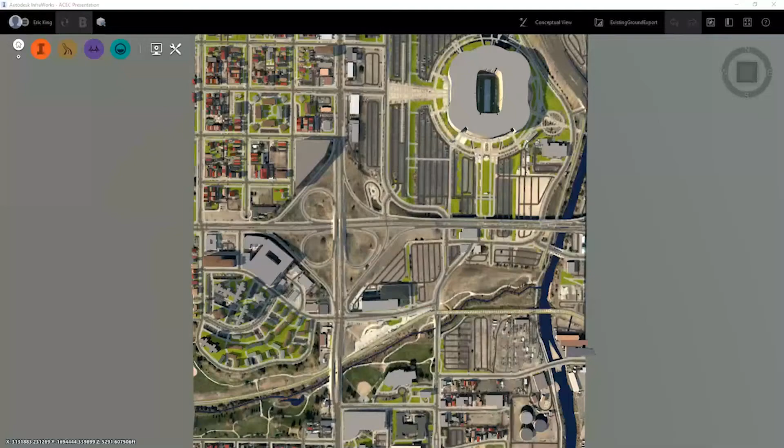One of the things I find with InfraWorks and Concept Station is you create this great big model. Yeah, it looks cool, but then what do you do with it? A lot of the time what you're actually trying to produce is something in plans, something that you can print.

For any of you that have ever used InfraWorks or Concept Station, you know that there really isn't much presentation that you can do with these types of programs. You can take screenshots, export images, do videos, but if your end goal is to actually create a plan set, it doesn't really help you out all that much to use something like InfraWorks.

There's a lot of data out there. You can get GIS information, GIS shape files, but you need to make sure you understand what you're looking for as far as coordinate systems. You can end up in any part of the world or any part of the country. A lot of people, that's the hindering factor for them. They don't truly understand what coordinate system they're working on, and sometimes they get data from different sections, and things just aren't lining up correctly.

So, to create a base file using InfraWorks, you have to create an area that you're going to be doing your study or proposal using InfraWorks. In this case, I live in Denver, or Lakewood, a suburb of Denver, so I'll show you an area around my neck of the woods. If we go to InfraWorks and open up the model builder, we can search for Denver, Colorado, United States, zoom in and look at the area we want to do our project.

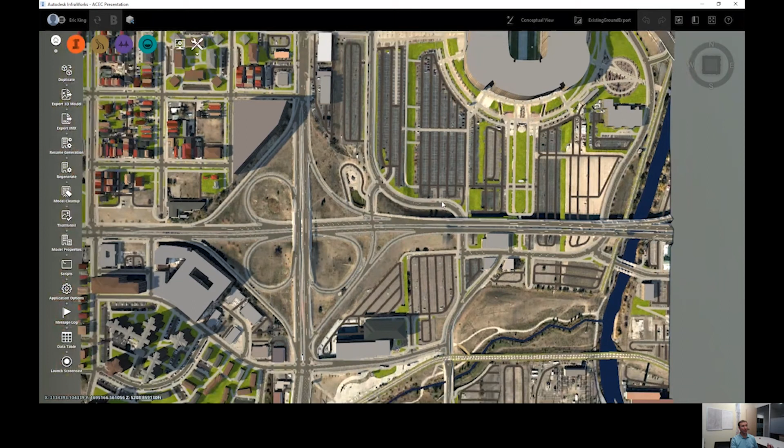All you have to do is go up to your settings and say export to IMX. IMX is the type of file you can create using InfraWorks to get into AutoCAD. When you first create your model, it automatically brings in all the different layers I mentioned before. You can see all the different types of data by opening up your data sources catalog - as you can see, there's a lot of stuff in here.

When you export your InfraWorks model to an IMX and bring it into CAD, this is a lot of stuff - things that could potentially make your computer crash, and honestly, a lot of things you're just not going to end up needing when you create the Civil 3D model.

So one of the things you can do, if you're going to be coming back to this, it's always nice to save a copy of this model space that has all your data. You can go in and make different copies so you can always come back. I'll make another copy and just call it existing ground export.

While that's loading, or after it's loaded, you can go in and delete all the things you probably don't think you're going to need. I don't need waterways, I don't need other roads, I don't need the ground, I don't need these coverage areas or buildings - you can delete all that info from your model. You probably don't need railways either.

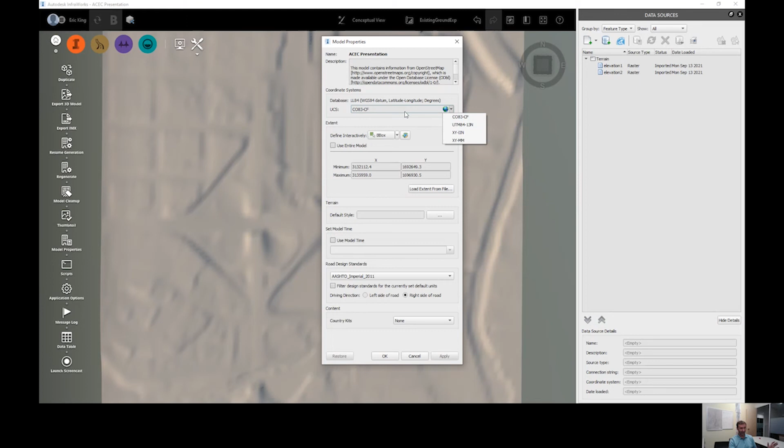In this case, I was on the UTM 84 13N coordinate system. A lot of the available information in the Denver area is actually this Colorado 83 central system, so I went ahead and changed that, and changed my roadway design standards to be in imperial instead of metric.

When you make those changes, it doesn't actually take effect in your model until you save and close out, so make sure you save and close out before you start exporting your model. Once we've got our model set up to having just the existing ground terrain, this is what we want to bring into our AutoCAD file.

Like I mentioned before, you can go up to the settings and just say export to IMX. Go ahead and make sure that your target coordinate system is the same as the one you're working in, and then go ahead and pick a location where you want to save your file. I'm just going to call it existing ground.

If you wanted to pick a specific area that you wanted to export, you could draw in a polygon or a box or a shape for that specific area. In this case, I want to export the entire model to bring into AutoCAD. Then all you have to do is click export.

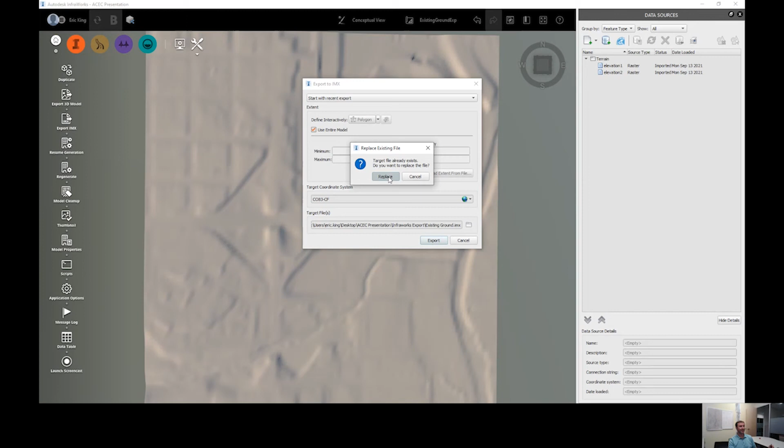As you can see, I've done this once before, trying to get all my files set up, so in this case I'm going to replace it. And boom, because it's not a very big file, there's not a whole lot of other information like the existing roads, it's a pretty quick export. So now that I'm done with that, I can go into AutoCAD.

One of the first things that you want to do in AutoCAD is to set your AutoCAD file in the same coordinate system that you're using in InfraWorks. Not a whole lot of people mess around with the coordinate systems in AutoCAD. They typically just leave it as unspecified in your tool space. Most of the time that's okay since you're not bringing in a whole lot of different information, so it typically doesn't matter. But you can set that coordinate system by going into the settings tab of your tool space.

Go into the right-clicking on the drawing settings for the file, and it's popping up on my other screen. Again, when you first open up this file, it probably says no projection, no datum. I've gone ahead and clicked on USA, Colorado, which is where I'm at, and then selected that same 83 Colorado State Plane Central Zone and US foot, CO83CF, which is the same one that I selected in my InfraWorks model. So once you select that, you can click OK.

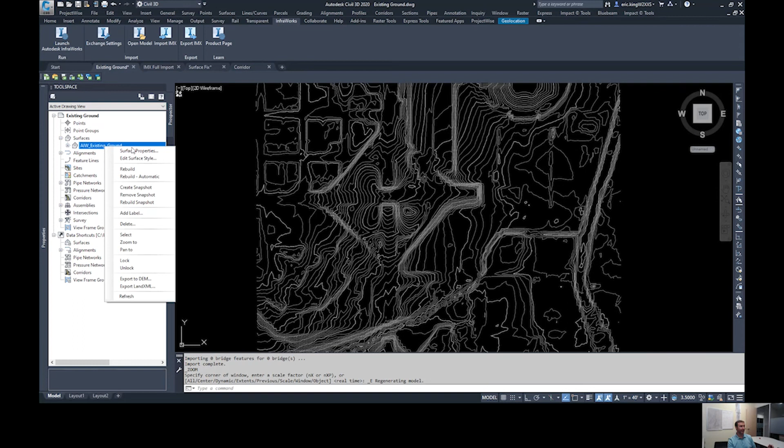If you have a seed file with all of the layers and configurations that you like to use for whatever workspace that your client's working in, you can start out with that as your seed file. So when you bring it in, you can go ahead and set all of your surface properties with all the styles and layers that you like to use.

Again, this is just an out-of-the-box file that I'm using for this demonstration. Let's see, you can go ahead and change your contours to display any way you like.

Then one of the other great things about working in a file with a coordinate system is you can see that my geolocation tab is actually highlighted. If you are working in a file that does have a coordinate system and you are actually logged in with your Autodesk account, this is one thing that a lot of people don't actually do when they start working in AutoCAD.

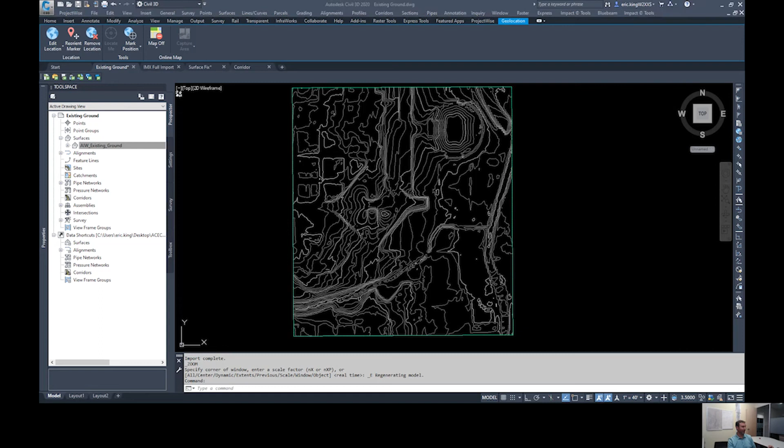If you're using the cloud licenses, or if you use any of the automated features for updating your software, in the lower right-hand corner of your toolbar on your desktop, you can load the Autodesk little app here that shows you all the programs that you have and everything that you can update. If you are logged into this, then one of the great things that you can do is you can actually turn aerial on and off to be able to have an aerial background as well in your file.

So without having to go in and download aerial tiles or anything like that, you can just load this to use as your backdrop for your files. So now I've got contours and I've got aerial. I'm already halfway there to being able to start laying out my design. One of the good things about this aerial is that it's very quick and easy to access. One of the bad things is it's not as customizable. It auto-populates, I believe it's a Microsoft Bing aerial map. It's pretty up to date as well.

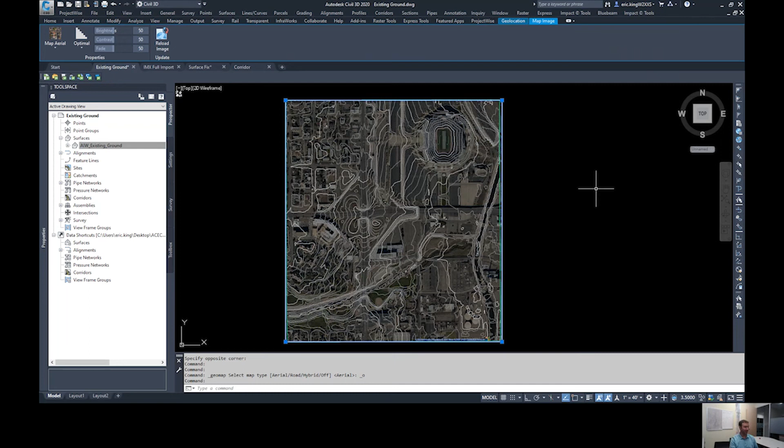One of the things that you can do is if you wanted to create a snapshot of the aerial so that you can manipulate the transparency or anything like that, you can do a clip of that, click the area that you want, and then turn the map off. And now you've got a snapshot of just that aerial. Now you can go in and start adjusting the transparency if you don't want it to shine up as bright, or the brightness or the contrast, all things that you can do to make that aerial look nicer or to look the way you want it.

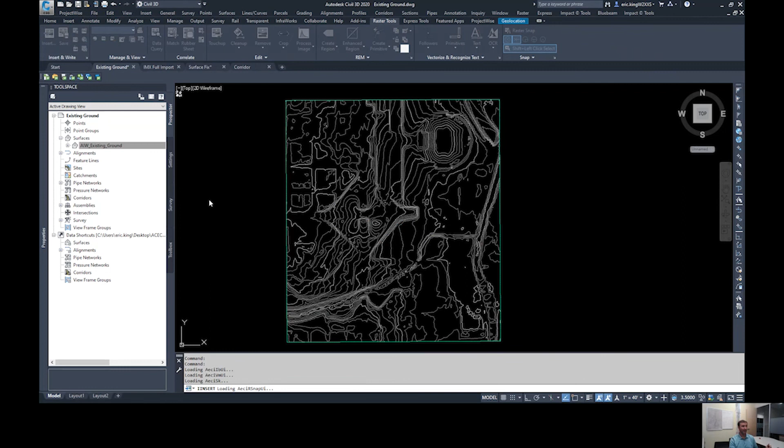In my case, I typically like to go in and find aerial from other sources, something to bring in that's a little bit more high resolution. I use Nearmap for a lot of the aerials that I bring in. You can either use the aerial that I just showed you, or you can bring in aerial from Nearmap, for example. A lot of people, if they have an aerial image, bring it in through the XREFs, where they can just attach an image. One of the bad things about this is bringing it in like this doesn't recognize the coordinate system.

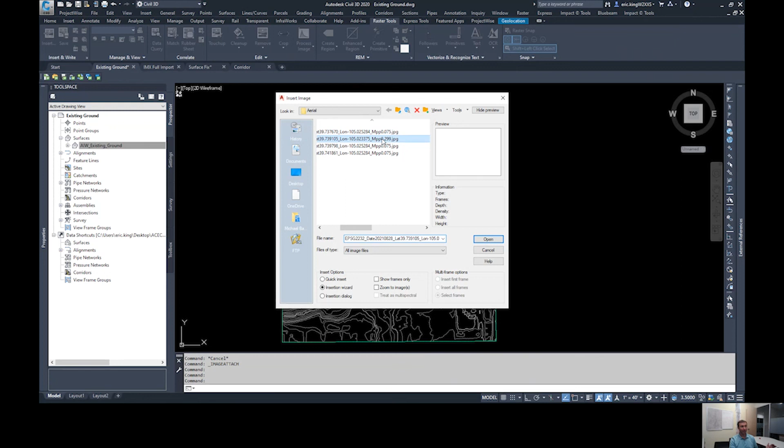If you go up to raster tools and insert, you can actually grab a georeferenced aerial image versus just a TIFF or a JPEG that's not georeferenced, that you'd have to set where that location is. Georeference, again, automatically brings something in where you want it. And again, I downloaded these aerials in that same Colorado Central State Plane coordinate system.

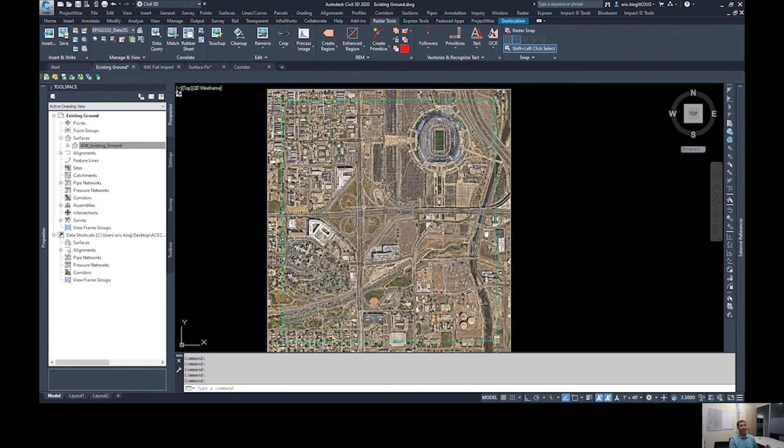So as you can see now, I have an even higher resolution aerial that, again, I can click on and manipulate any way that I want and create an aerial XREF base file to save and to reference into my sheets. For this drawing, I'll just go ahead and detach it. But yeah, just a couple different options of bringing aerial into your files. Once you bring that in, then you can save this. You can start creating your data shortcuts the same way that you would set up the design in any of your other sheets.

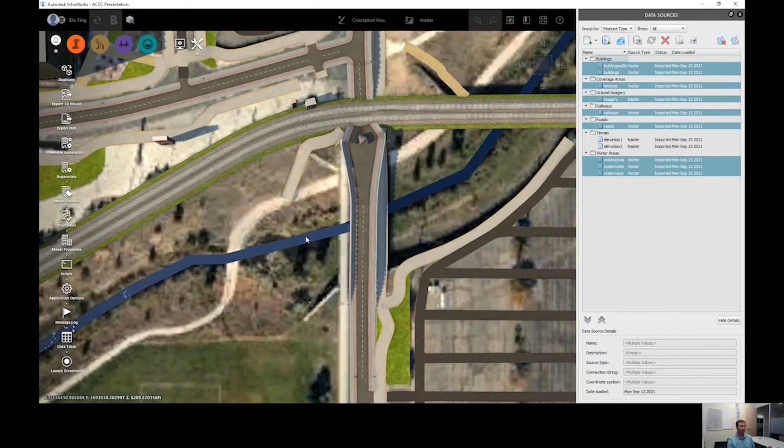Okay, now let's see. One of the other things that I use this for, if you do a lot of work in InfraWorks, such as proposals or graphics for public meetings, one of the things that I find never ends up looking quite the way that I want it is an existing ground near a bridge. If I go back to my master file here, as just an example, you can see that InfraWorks brought in a small bridge over a canal that has a drainage ditch going through it. That is definitely not what I wanted the existing ground to look like in this area.

And if this is an area that I was proposing a new bridge or creating a graphic for, I wouldn't want to show an existing ground that looks like this. So if you're setting up AutoCAD files to actually produce a plan set off of, that's one thing. Or if you want to just manipulate data to then bring back into InfraWorks, that's another great tool to use, Civil 3D, to manipulate that surface.

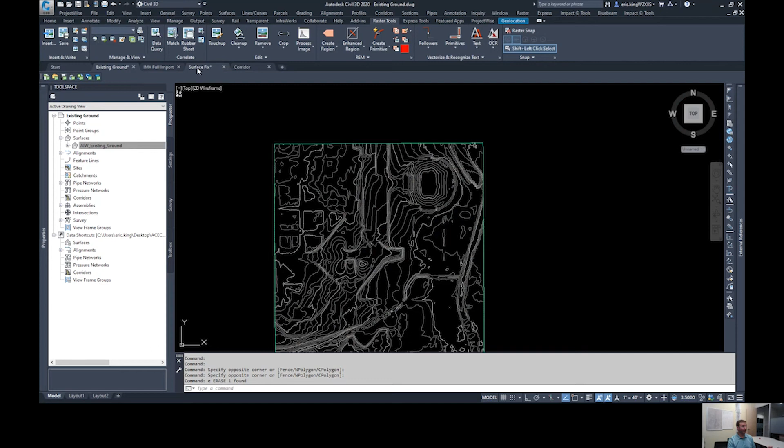I won't go through the entire exercise of how you would want to do that, but if you bring in your existing ground surface, in this case, this is that area that had that small bridge and channel going through it. I do know that I want more of a defined channel in this area, so I drew in some break lines and added those to my surface to create more of an actual channel shape underneath that bridge.

All you have to do is make sure that your file is saved. And then you can go back to your InfraWorks tab, and then this time, instead of saying import IMX, you can say export IMX. It asks you where you want to save that file. It automatically saves it in the default location of where your file is located. It asks you what version. I typically do the version 2.1. And just like that, it exports your surface into an IMX that can then be imported into InfraWorks.

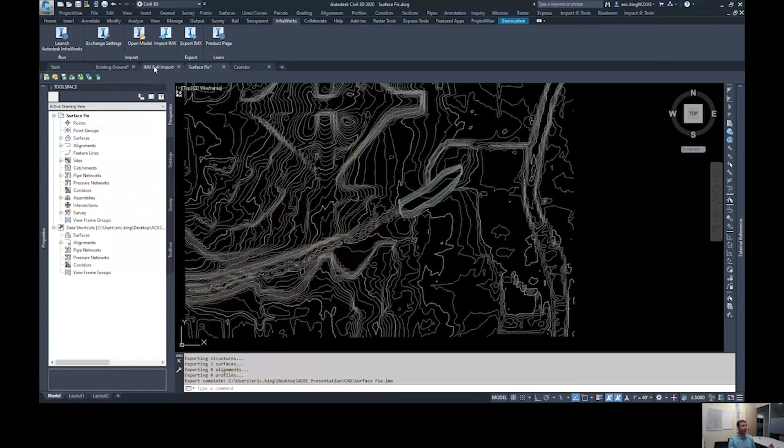One thing that I forgot to show you is back when we had our InfraWorks file that did have all of these items. If we were to export to an IMX with all of this data as shown right here, you'd end up with an AutoCAD file that looks like this. It tries to create an alignment for every single roadway that your InfraWorks model tried to create by default. So in this case, every single parking lane in a parking lot, every single side road, every single

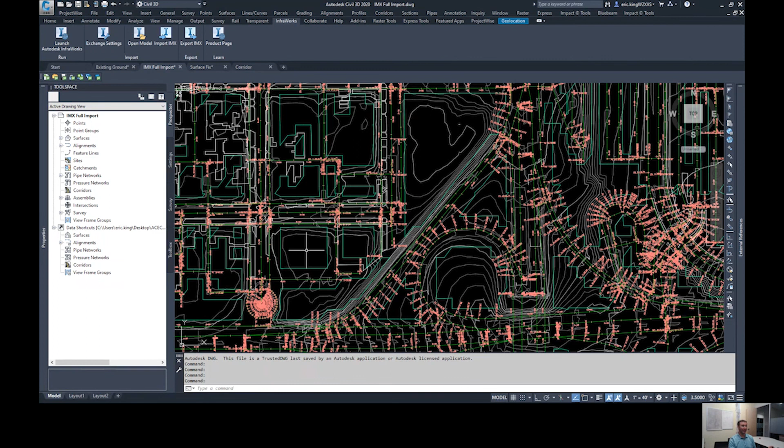alley. It tries to bring in the shapes of buildings, which you don't necessarily need. Sometimes it's kind of nice, but they're not always accurate and up to date. It created alignments for cul-de-sacs. So yeah, a lot of stuff that you'd end up having to delete out of your file. So it's nice to just delete it out of InfraWorks beforehand versus trying to delete it all out of Civil 3D after you bring it in.

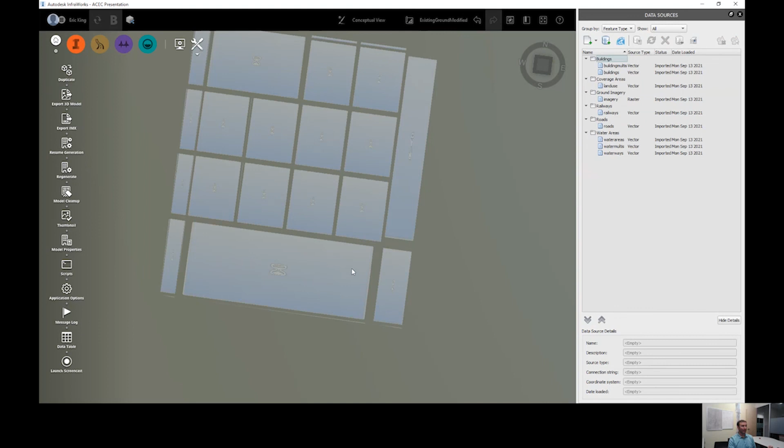Sorry about that. So yeah, back in InfraWorks, now that we have created our file from AutoCAD, again, we can go in and create another, actually I already created one here called Existing Ground Modified. This is just a copy of our master model. You can see that there is a terrain here. We want to go ahead and remove that terrain out of our file. What that does is it flattens all of the data that we have in.

These are all of our planning level roads and water surfaces. But again, you can see that the buildings are actually already snapped to the surface when they were imported. So we can bring in the IMX that we created from AutoCAD by just importing IMX in our Data Sources tab and browsing to our folder. Export, and I called this, oops, sorry. Oh, I saved it under Surface Fix.

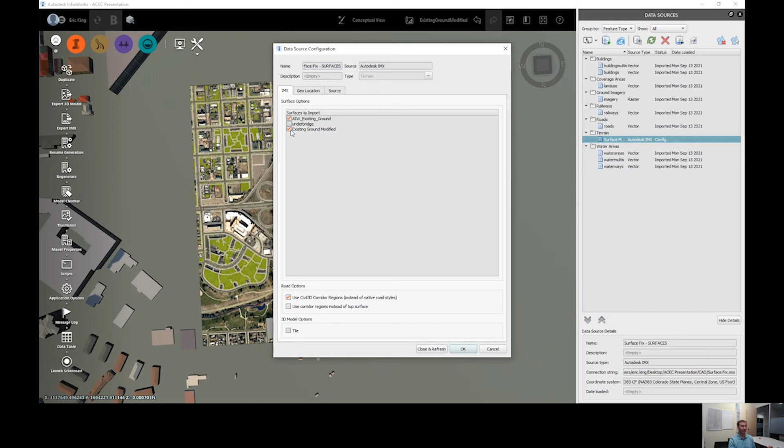And when you bring it in, a lot of the times it doesn't automatically configure, so you have to go in and configure the file. In this case, all I want to bring in is the existing ground modified surface that I created. So I want to make sure that's the only one checked. Hit close and refresh. And then if we zoom back to that location, you can see for that small area where I went in and adjusted the surface, now it looks more like you would expect, a nice well-defined channel.

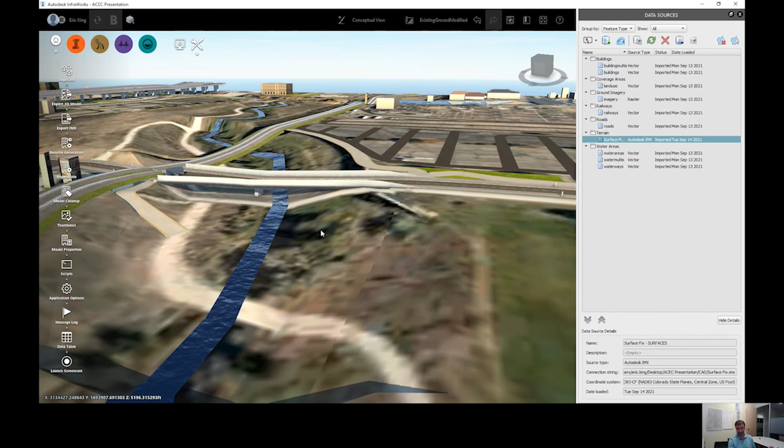Okay. So once you're working in AutoCAD, you've got your existing ground surface in there, and you can go in and start laying out your corridors, any of the design that you're looking to do. And if, say, you did want to create some graphics in InfraWorks from the work that you're doing in AutoCAD, you can also export items from AutoCAD back into InfraWorks.

It's not a straight update back and forth. If you make something in AutoCAD and bring it into InfraWorks, they don't necessarily read each other live. You do have to do an export from AutoCAD back into InfraWorks whenever you want that new change to be updated. Again, here we just have a corridor. Whenever you export to an IMX, you have to make sure and hit save first. And again, we'll do the same thing here. Export to IMX. Where do you want to save this? It's going to save it in that same folder, save it as version 2.1, and it saves. And it always just saves as the default name of your drawing.

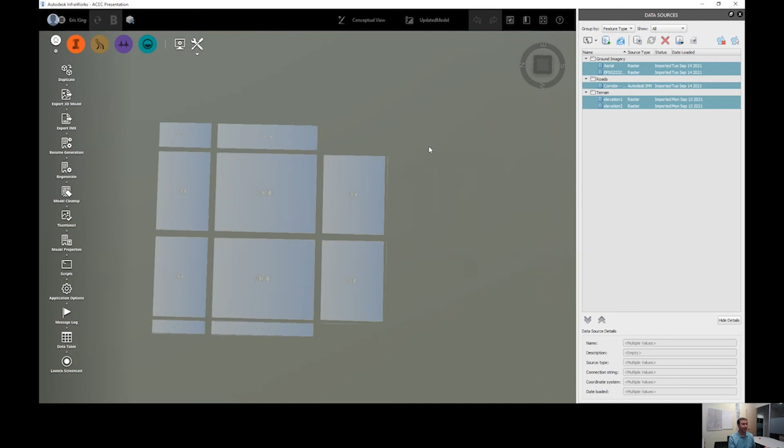So again, if we wanted to create another model space in our InfraWorks for all of our new work, I've gone ahead and created another working area in here called Updated Model. Sorry, it always takes a minute to load from space to space. And in this version, I deleted out the aerial that InfraWorks brought in and brought in that same Nearmap aerial, which I brought into AutoCAD earlier. As you can see, it's a much brighter, crisper image than what was brought into InfraWorks automatically.

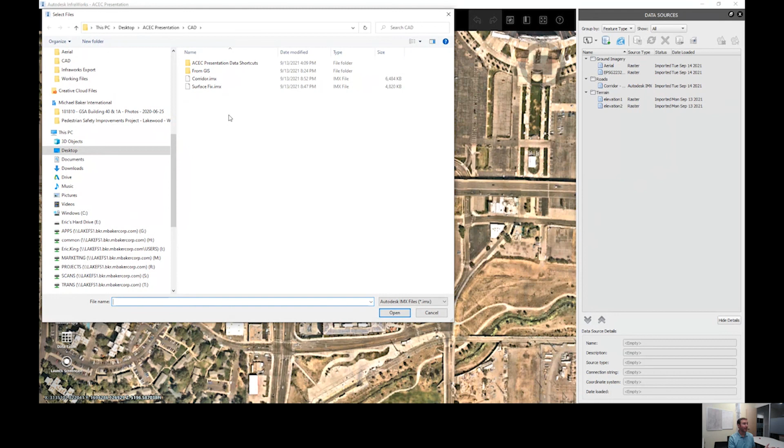Similar to how we brought in the existing ground surface that we modified down near that bridge, we can bring in our corridor the same way. So we want to go back and bring in the Autodesk IMX. Here's our corridor file that we exported earlier. And it's asking you, what do you want to import? Well, the surface is already in there. I don't need to do that. I just want to bring in the corridor that I laid out in AutoCAD.

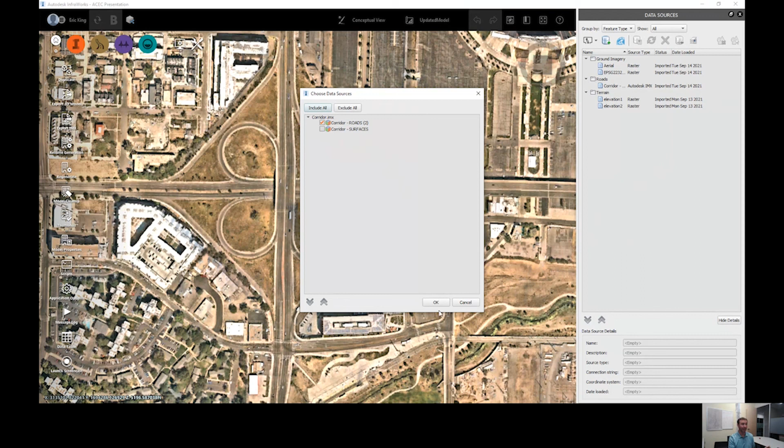So once you bring it in, a lot of people get frustrated because they bring it in and nothing happens. The file says that it's configured. But in most cases, when you bring in these types of files, you have to go to the configure and just close and refresh it to get it to update in the model. And there you can see there's the corridor that we laid out. Again, you can start manipulating it. You can add different side conditions and fill slopes, that sort of thing, to make it look like whatever you want.

Okay, what else do I have here? So yeah, that is the majority of my presentation. Some of the other things that you can do too, there's a lot of open source data out there. The City and County of Denver, for example, you can go onto their city website and download additional GIS information. Again, InfraWorks has all sorts of files that it recognizes. Again, shape files you can bring in.

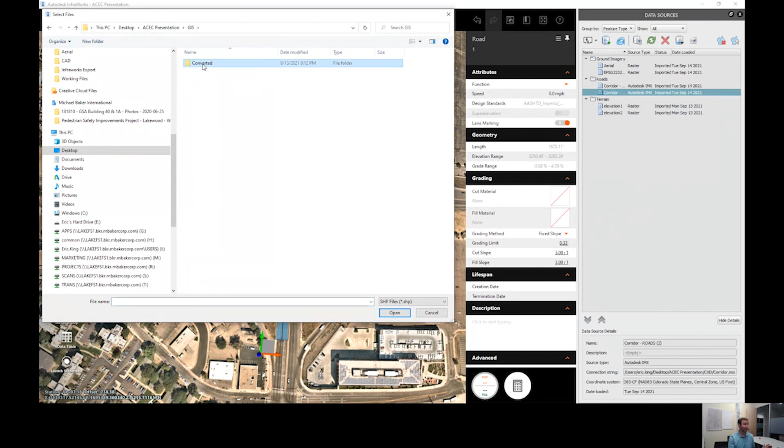In this case, I downloaded GIS files from their website. When you bring in GIS files again, it's going to ask you for all that same information. You know, where am I at? Assuming that it's in the same coordinate system. I only want to see the parcels that are actually clipped to my model. I don't need to see them for the entire city. I'm going to bring in some parcels. So you want to label them as such. And I want them to show up as a thick yellow line, so it makes it nice and easy to see.

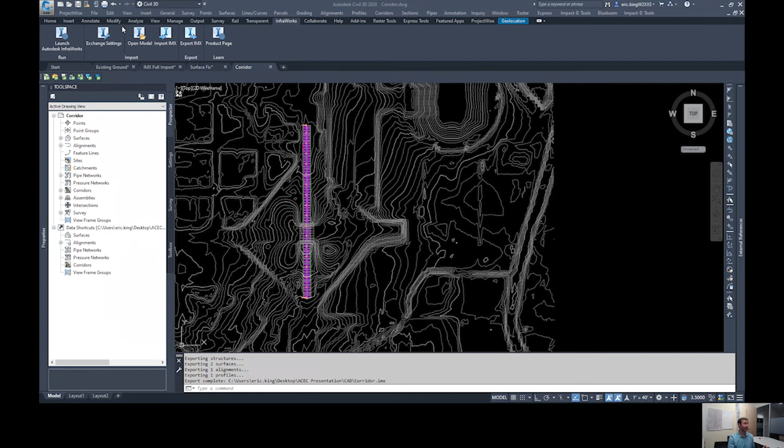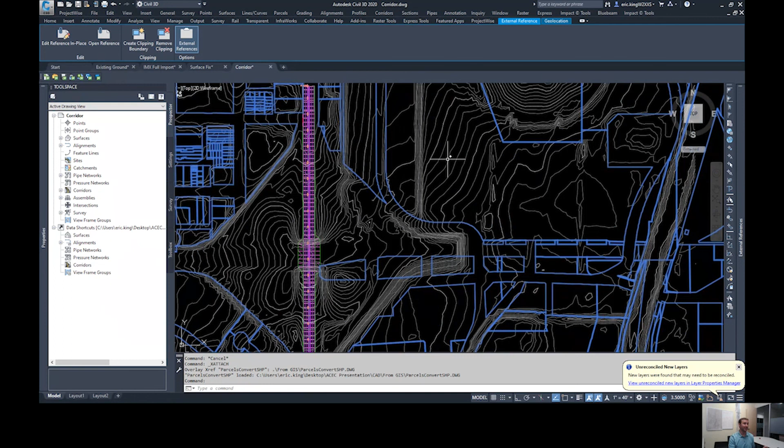That's usually a pretty quick update here, and still refreshing. Sorry about that, but yeah, now you can see all the parcels that are brought in. You can do something similar. Again, I've taken the parcel file and using either MicroStation or ArcGIS, you can convert those to CAD files and bring in that same shape file into AutoCAD. And those are usually the main things that you're looking for when you're laying out planning studies or different alternate routes for different corridors. You need the existing ground, and you typically want to know where the right-of-way lines are.

All right, well, thank you very much, everyone. Again, I'm definitely not a pro at either InfraWorks or AutoCAD. These are just some things that I've found over the last couple years working on projects where I didn't have the best information out of the box, and trying to figure out how I can get that quick and easy. I'm not the most patient person in the world, so relying on different sub-consultants that use GIS to get me this data, download aerials, get topography and convert it using ArcGIS. There's a lot quicker and more efficient ways out there to just do it yourself sometimes, which is what I've always found to be the most efficient.